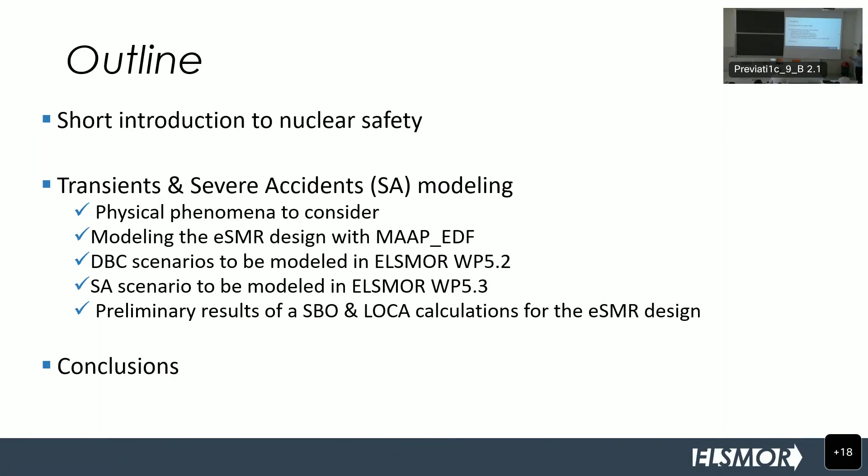And then I'll give you some elements for conclusion. So before I go to the real accidents, just a short introduction to nuclear safety.

Do you know what a risk is? Is it equivalent to a danger? Is it dangerous to do skydiving? Is it dangerous to fly a plane, or is it risky? Do you have elements? It is risky, you say?

In terms of a mathematical or nuclear approach to risk, it's about how dangerous something can be, and also considering how frequently it happens. So it might be a lot dangerous, but if it doesn't happen very often, then the risk is low.

Exactly. So if you take a plane, for example, if you fly, it's dangerous because you can have a crash, right? So it's dangerous. But is it risky? It's not risky, because a crash doesn't happen so often—we only hear about some plane crashes or skydiving issues occasionally.

So what is a risk? A risk is an exposition to a danger or damaging event during a situation or activity. It's defined by the probability of this dangerous or damaging situation. There's a small equation: risk equals probability times consequences—exactly what you mean, depending on the frequency of the situation.

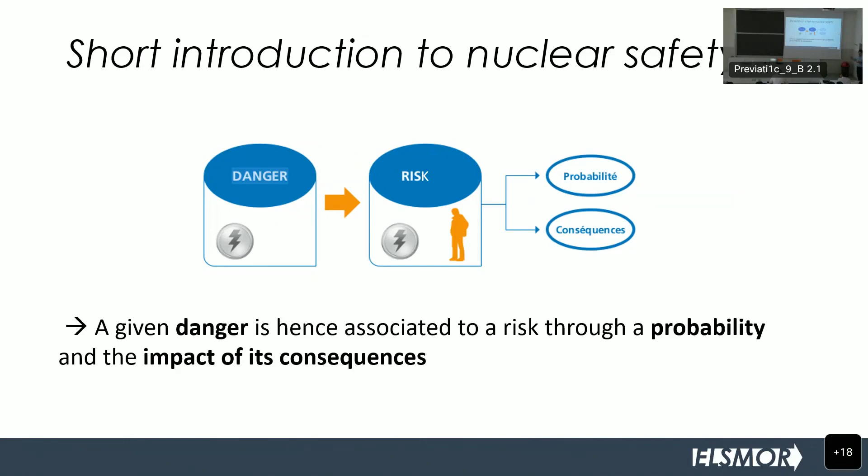Let's look at the Farmer diagram—maybe you've seen it before. It's very well known. Here you have the frequency or probability of an accident or event, and here you have the severity or consequences. This is a line: below it is acceptable, above it is not acceptable. You see what I mean?

So let's say I have a very frequent situation happening every day—I have to have very, very low consequences. It has to be very modest, very low in terms of consequences. But there is still some.

If you go this way, it's prevention—we try to reduce the occurrence of this accident—and this is mitigation, where we want to reduce the consequences. So it's easy to understand. And also, there is something we call the residual risk. Do you know what it can be?

There is this residual risk. It means that whatever we do, we cannot get rid of it. It will, you can do everything, it can still happen. Can you give me an example? I don't know.

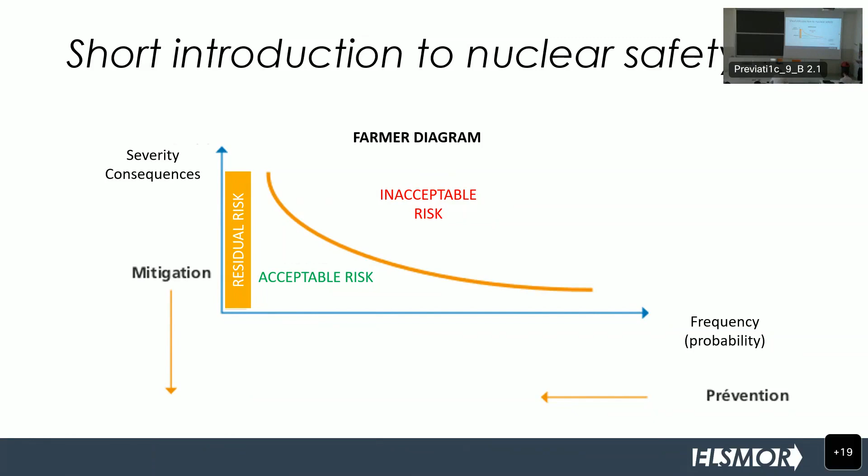So now let's talk about the transients we look at. Here is the frequency by year for this kind of reactor. Here you have the normal operating condition. Let's say we have a hot shutdown, which means the reactor is stopped. It's in a safe position and nothing is happening. It's just in a hot position, and it happens many times a year.

Normal operating condition is what we call category 1. It happens all the time. Then you have the incidence, so the frequency is between 1 and 10 to the minus 2. For example, you have transients like a station blackout or a loss of feed water.

Those transients, like station blackout, are like the Fukushima initiator. Loss of feed water is like your steam generators are not fed, there's no water anymore inside for cooling the steam generators.

If you go to accident now, it's more severe. You have more consequences but the probability is lower. So this is category 3. It can be a small break LOCA. LOCA is a loss of coolant accident, which means you have a break in a pipe, or in an SMR you can have a break.

Then you will have water flowing, and the level of water will decrease if you do nothing. One time, if you don't have any kind of safety system, it may lead to a severe accident. If we have a safety system, we can manage the accident and won't have any core degradation. And the probability of those kinds of transients, like steam line break also, and steam generator tube rupture.

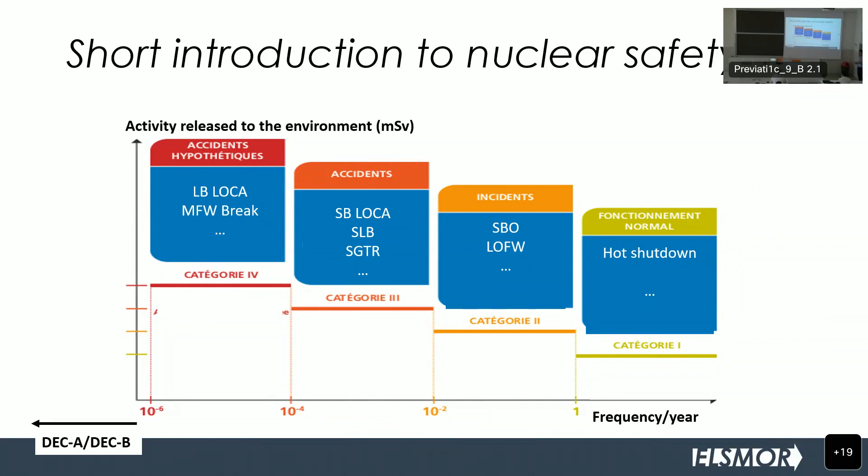So now we know a little bit more about safety and how it works. Let's look at the physics now, the more interesting part.

In order to model an accident potentially leading to a severe accident, in an SMR or a classical PWR reactor, many physical phenomena must be modeled in both the reactor coolant system—the primary side and the secondary side—and also the containment. We have to evaluate the releases and so on. So here is an example, just an example for a PWR.

But for a small modular reactor, it will apply also. So let's say in a PWR, we have to model the natural circulations. Let's say you have lost your pump, the pumps are off. So if the pump trips, it happens a lot. In a year, the frequency is very high. So we have to be able to evaluate the natural circulation inside the reactor coolant system.

We have to be able, for example, to evaluate what is the heat transfer from the core, the basics of the physics. We have to be able to see what is going on with the pressurizers, the heaters, the sprays, the heat exchange in the steam generator, many things. I'm not going to detail everything, but we have to take into account many different systems.

Let's say if you have safety injection, emergency safety functions have to be taken into account too, right? And then if you go to a severe accident, things are much more complicated than that if you are looking at a DBA accident.

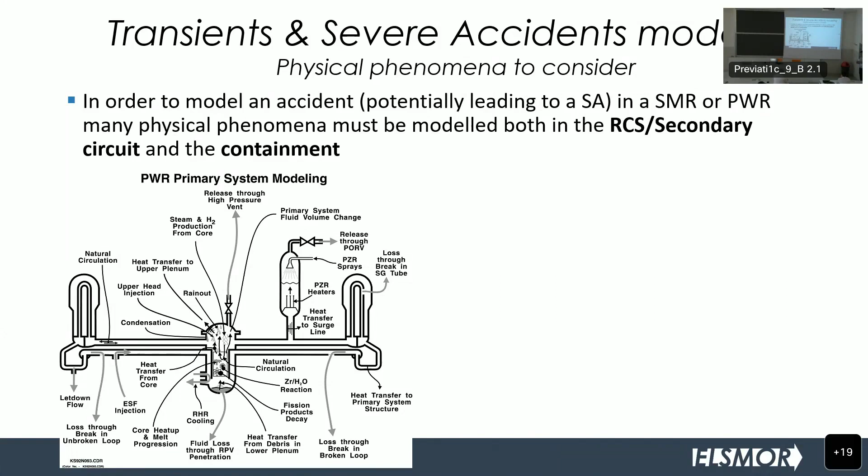So we have to evaluate the flux. So I will show you a video about that. We have to evaluate the flux between the corium and the vessel to see if there can be a breach in the vessel and what condition, what we can expect.

So this is only for the reactor coolant system and secondary side. Let's say this is for the containment. So many other different physical phenomena to model.

So for example, you can have a quench tank flashing, if you have a transient with the heating of the primary circuit, then the pressure will increase, then there will be a flow between the pressurizer and this quench tank in order to keep the water, but when there is too much water, it will flow, there will be a break, and then it will flow directly to the containment.

You have to look at the aerosol deposition if you have fission product releases. You have to look at the condensation. You have to look at the spray if you have spray. Maybe you can have fan coolers, or you have to look at the iodine chemistry. So it's a lot of different physics to look at.

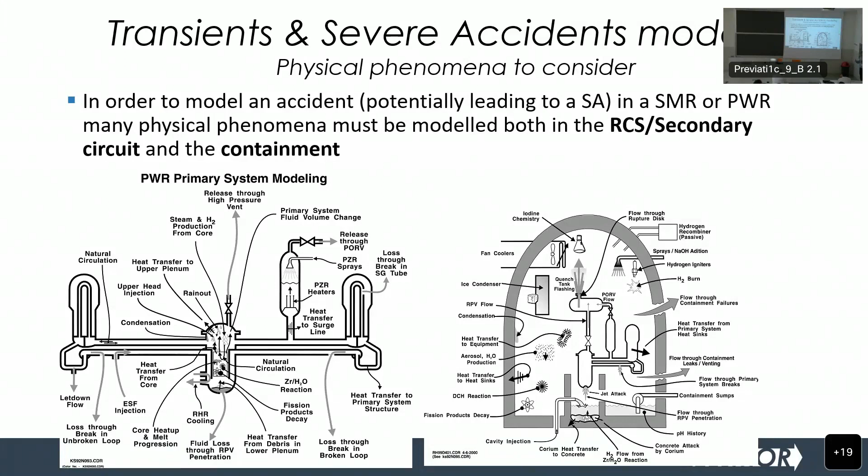So yeah, I just tried to write here what we have as a slide before. So the physical phenomena to consider. So it's not an exhaustive list, of course.

So you have to consider the thermohydraulics in the RCS and secondary circuits, in the containment, the core degradation and melting, if we have, the zirconium oxidation at high temperature, the potential energetic H2 burns.

I didn't talk about that, but hydrogen is a gas, and it can burn and lead to a big combustion, like in Fukushima, for example. That could be devastating for the containment. So we want to get rid of that. We want to be able to stop that before it happens. So we do some things in the reactor like recombiners, or we can use igniters too.

So we have to look at the fission product releases also in the core, from the core and to the containment and the environment. The possibility of a vessel breaching at a high pressure, which is like when the corium is there, and then it's attacking. It can be a creep rupture, and it will have big consequences in the containment and maybe into the environment. So also there is thermochemistry and the thermal exchanges in the lower head.

For what I call the IVMR, I will talk a little bit later. IVMR is a strategy we use in the SMR design. So we want the corium, the magma, to stay inside the vessel. We don't want any breach. So we are trying to cool it down with water outside in order to make sure there is no breach.

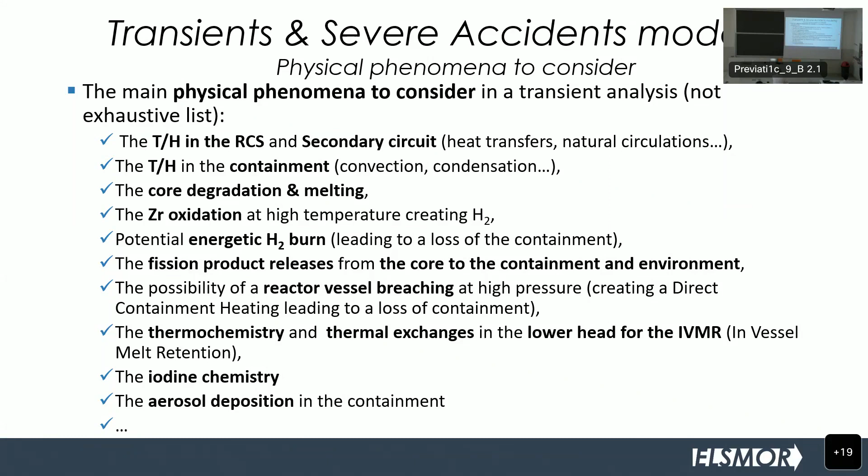So look at the iodine chemistry, aerosol deposition, and so on. Each physical model has to be validated, right? You cannot use it just because you have made a new equation. You have to validate it against experiment or code-to-code comparison, on an already validated code. This code is good, we're going to compare against it.

Also, to ensure this is valid, some models may interact with others. It's very complicated, not only small things. And to make sure all those couplings are well taken into account, we have different levels of validation. We have what we call the separate effect, where we look at separate physics, like thermohydraulics or fission products analysis or just corium heat flux. So we have experiments here like BETHSY for thermohydraulics, and LIVE for the corium behavior.

Also we have what we call integral benchmarking. Integral benchmarking is like we have a small reactor, small scale, and for example we have the Phébus experiment. Phoebus is a CEA experiment, IRSN, it was in the 90s, a French experiment. They used real assemblies and had a severe accident there to look at how the fission products, how the cladding will heat, how it will melt, how the fission products will distribute inside the reactor.

And then after that, we have of course the real reactor cases, like TMI. TMI is a big one for severe accident analysis, and later the Fukushima accident. So we use that to improve our codes and to be able to model those accidents. As I said, a lot of R&D is necessary for this kind of activity, to ensure the code can model a transient, or a transient leading to a severe accident, both.

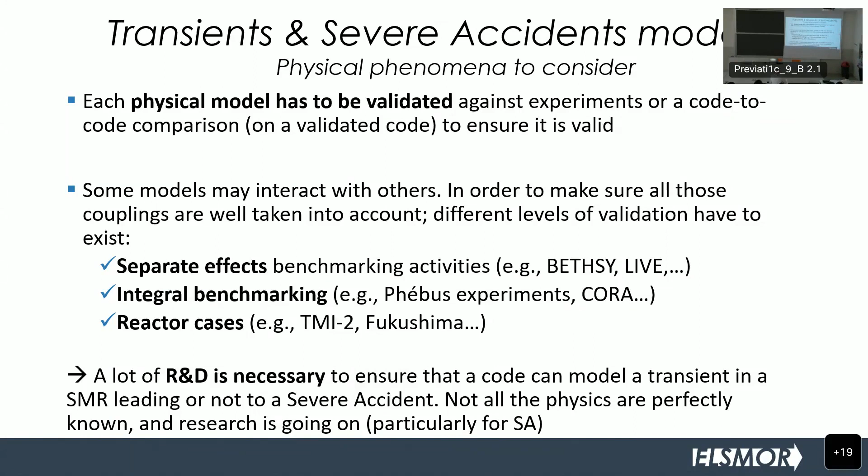Now I will talk about the modeling. How do we model the ESMR with MAAP code? There are many different codes, right? I will show you MAAP, but all the codes have similarities, of course. MAAP stands for Modular Accident Analysis Program. It's an EPRI code, the Electric Power Research Institute, in the US. It enables modeling of both transients and severe accidents for PWRs, and SMRs.

Also it can model BWRs, like the Fukushima reactor, boiling water reactors. It can also model the VVER, the Russian type reactors, and also the CANDU, with our Canadian colleagues having a version to model the CANDU too. So yes, this code is used internationally. We use it in France, it's used in Japan, in England, in all the utilities in the US, in Canada. A lot of people are using it to model severe accidents, and do what we call the PRA, probabilistic risk assessment.

So this, for example, is the meshing we have used for the ESMR design. It's very simple, right? You have only a few nodes. It's not a detailed code like RELAP or CATHARE. You have let's say 10 nodes, but it allows modeling the whole vessel. You have the lower head here, the core, the plenum, the hot leg cone, the hot leg riser, and then the water is pumped from here. It gets hot through the core, then cools down through the steam generator, and gets back to the downcomer and back to the core, right? It's a very easy modelization, but it gives good results.

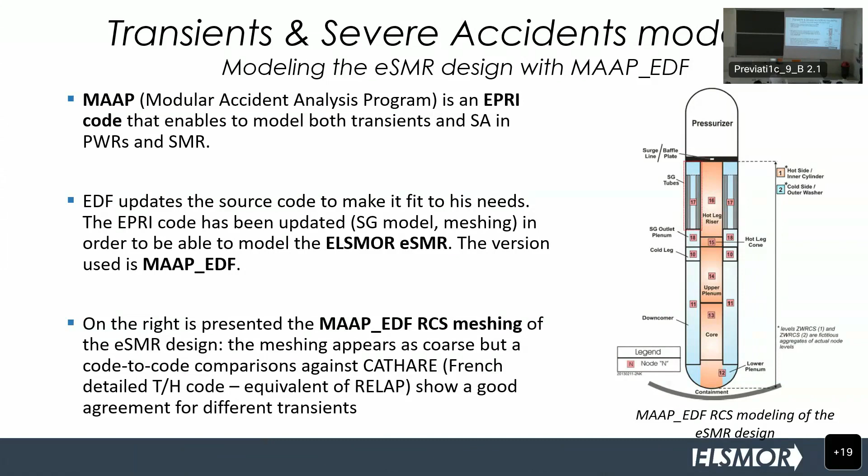So the code enables us to model the transient physics in both, as I said before, the RCS and the containment. This is, let's say, a strength of this code. You can do it all at once.

There is also hydrogen generation. When you have hydrogen generation, the hydrogen is very light compared to air, so it will go up into the containment and you won't be able to condense that. The concentration could get high, and it could lead to a combustion. So we want to get rid of that.

One thing to mention regarding the SMR compared to a large PWR is that the SMR has a relatively small free volume. Do you know the volume of a PWR, let's say an EPR, the big one? What is the free volume in the containment? It's huge - you don't know? It's like 80,000 cubic meters. 80,000 - it's enormous, you see what I mean?

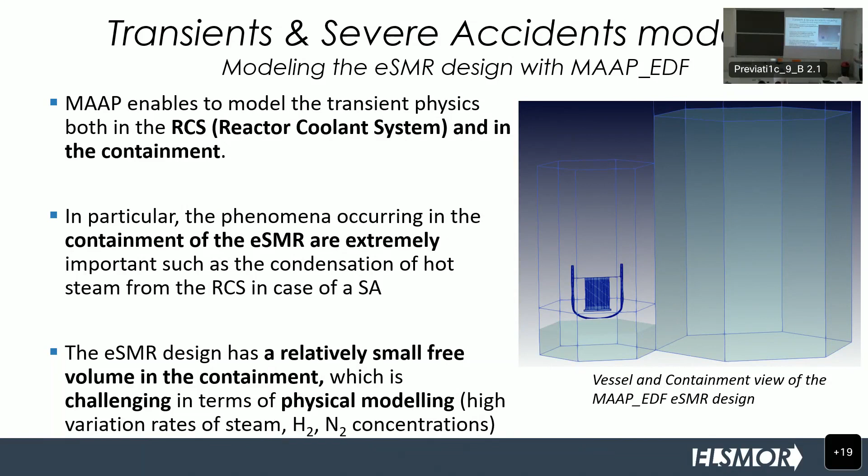So for this kind of reactor, what could be the volume? 5 to 10,000? No - it's like 2,000, you see what I mean? So the power is not so small compared to the EPR power. EPR power is like 4,500 megawatts thermal, and this one is like 540. So the ratio is not good, because you have a smaller volume for a higher power - the power density is higher. So you have to evacuate the decay heat if you have a severe accident. We looked at it too in the ELSMOR project.

Now I will try to introduce what kind of scenario we've chosen to model in WP5.2 regarding the DBA accident - what kind of transient, and what it implies for the safety analysis. We've decided to model two different transients in this DBA transient analysis.

The first one is a station blackout. In a station blackout, I'll talk about it later, but you lose everything - no more electricity supply, so you have to manage by yourself. The pumps will stop, and then you have natural circulation, and you'll see what is going on.

Another transient initiator is a LOCA, a loss of coolant accident. There's a break inside, here for example - you have the vessel, in the primary side, at the top of the steam generator, you see that. You'll have a break. The reactor will depressurize, and if you do nothing, you'll be losing water, and the core may heat up. There might be a heating, and then the core can degrade at this time.

Of course, for the DBA analysis, we assume that we have a safety condenser. Eric already talked about this this morning - what is a safety condenser? Here you have, for example, the NUWARD design - here's the vessel. Inside the vessel you have the steam generator, the compact steam generators, and then you have this condenser with valves you can open or not. There will be natural circulation - it's all passive. The water is heated by the core, goes through the steam generator, and is cooled down.

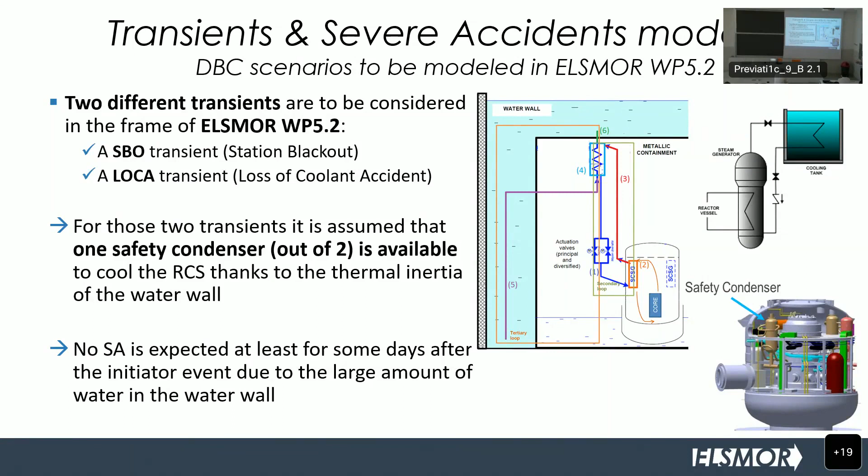Now let's go a little bit deeper inside the station blackout transient. Station blackout, as I said, you have the loss of the main cooling system. This will lead to a scram, reactor scram, so the reactor rods will get inserted. After a few minutes, you will be in decay heat mode, and then you will use the safety condenser, which we call RFP, to cool down the primary circuit, evacuate the decay heat, and depressurize the primary circuit. So physics to address: natural convection, primary side, secondary side, and of course tertiary side. So it's quite challenging physically.

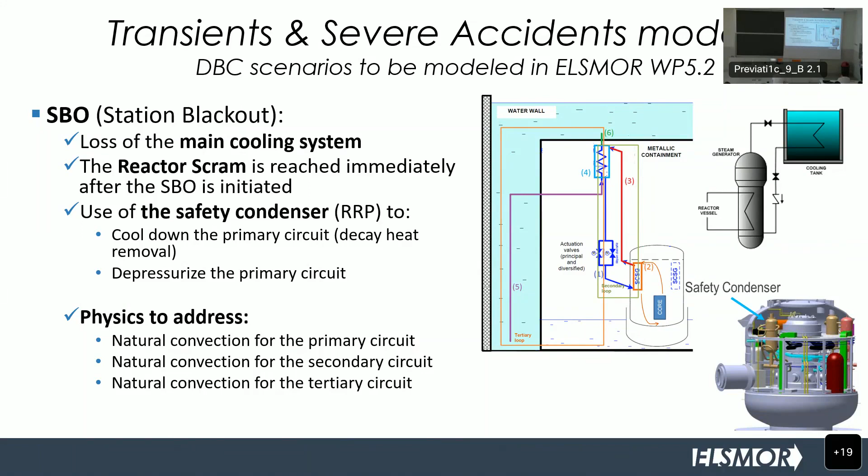Do you understand why? Can you repeat the question? Sorry, to ensure that the controls are fully inserted? Yeah, but do you know why? Maybe I asked the wrong question. The question is, the pressure is going to increase in the containment. Do you know why? Because we have a break.

Because, not cooling anymore - creation of steam, yeah. In fact, when you open a break, let's say the pressure in the vessel is like 150 bars, high pressure, and it's hot water at 300 degrees C. So when you open the break, this water will flash - it will instantly become steam in the containment. So we add a lot of energy in the containment, and this will increase the pressure, right? You know this PV equals nRT equation, of course. And then so many protections exist for the ESMR.

One protection is like a stop on overpressure. If there is an increase in pressure, it's not normal - something is happening, so we have to stop the reactor because of this high pressure. For example, when the pressure reaches like 1.5 bar, then you will have the automatic drop of the rods inside the vessel.

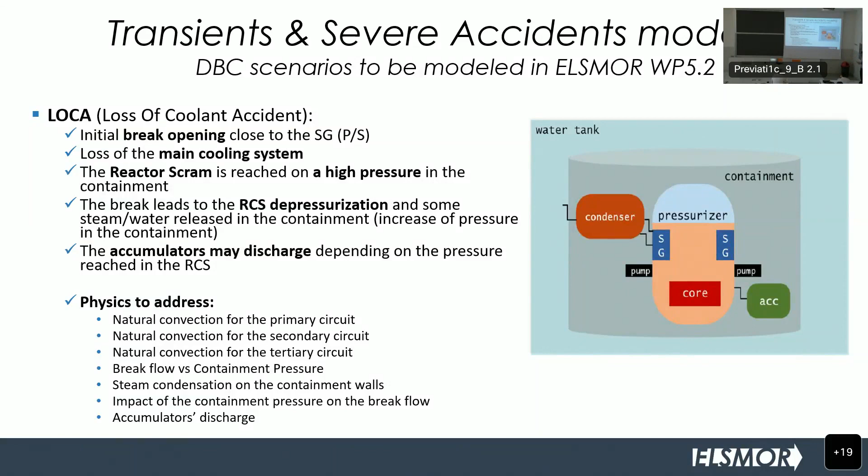So now let's talk about ELSMOR 5.3, which is the severe accident analysis itself. We are going to model two transients, station blackout - same initiator, but the consequences are not the same. Station blackout and LOCA: we assume there is no safety condenser available and no cooling of the RCS, so we expect core degradation.

As the water of the RCS evaporates, one important thing is the onset timing of the core degradation - the time the core begins to uncover. At this point it will heat very, very fast. In about 15 minutes, if the core begins to uncover, you can have a severe accident, and you cannot get back - it's an irreversible process.

Containment pressure and temperature will increase due to the creation of non-condensable gases and hot gases, as I mentioned before. It's a whole thing.

So here, for example, you have a picture of core degradation calculated by MAAP, but I will show you a video now. Just before that, I'll give you the sequence of the transient so you understand better. So the station blackout - let's say phase one is the initial phase of the accident.

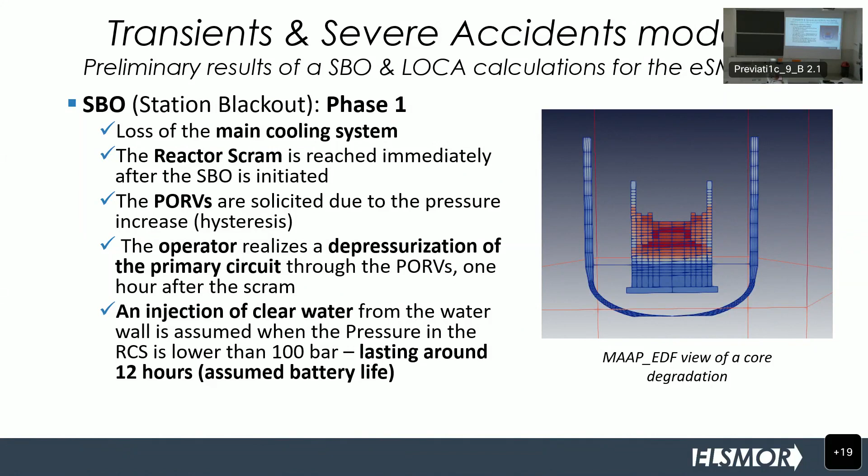But this system is not passive - it's an active system, so it has to rely on the battery, and the battery life is around 10 to 12 hours. So after 12 hours, no more water. There is no miracle, right? If there is no water, you go to core degradation.

Yeah, I have a video. I don't know if I have to go... maybe.

Just below. It's below. Click here. Below. Below. I think it's below. It should work. Voilà. Okay.

Okay, so this is, for example, a MAAP calculation for the station blackout transient. So you see the water wall here, the containment here, very small, and you have the vessel here, right? So you can see only the vessel, but it's good to see the severe accident progression.

So you see that at the beginning we had a level of water. The level of water is increasing because we are sucking water from this pool, right? After a while it stops, because of the battery life, and then we are going to degrade. I didn't want to show everything at the same time, but it's okay, no worries.

We are going to talk a little bit about what's going on. Once all the water is evaporated, you see what I mean, the core is going to melt, producing a lot of hydrogen. Here you have this variable for the hydrogen concentration in the containment. You see that it goes to 60%. You know 60% is huge.

Do you know Shapiro diagram? No? Shapiro diagram is just that, if it is possible you have a combustion or not. If you have a concentration of hydrogen higher than 4%, you can have a combustion. Here it's like 60%, so if you do nothing, you will have a combustion.

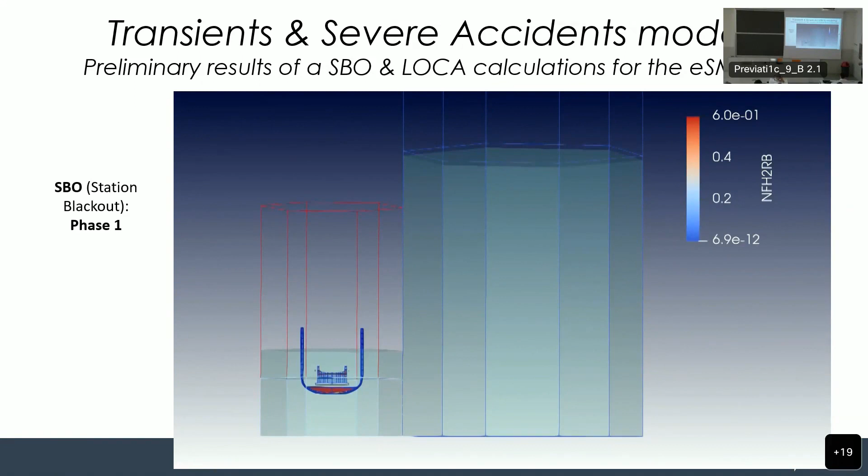So yeah, I talked about everything at the same time. It's okay. So after the water injection stops, no cooling, the water is evaporated, the core uncovers, starts to heat up, hydrogen is generated, the core melts, and the water outside the vessel enables us to cool down the whole thing. So we are lucky in that case.

The IVR situation is good, especially because we have, let's say, a small core. It's a 540 megawatt reactor, so the decay heat after a while is 2-3 megawatt, you see what I mean? So you don't have any kind of issues because it's a large vessel compared to the decay heat we have to evacuate. I will show you heat fluxes in a minute.

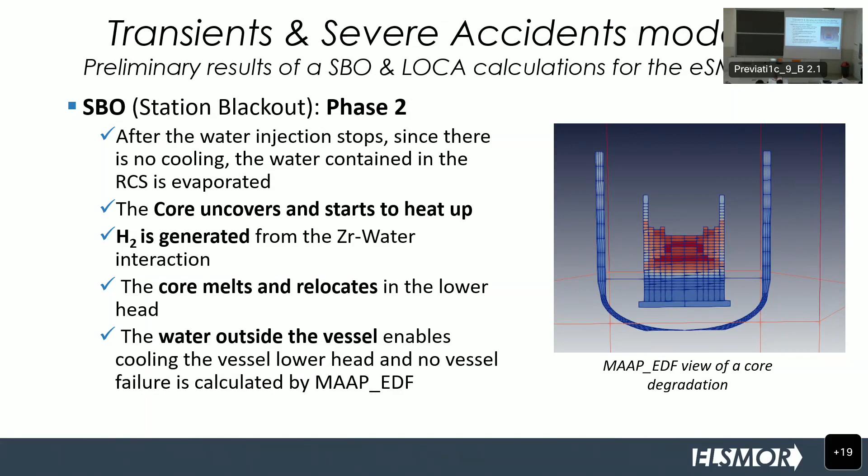So this is a zoom, you know what you saw before. You have a zoom of the core here, the support plate here, and you have the vessel lower head here. You have the circular part or ellipsoidal part of the vessel, and then you have the cylindrical part, the straight part of the vessel, and then the bottom.

And yes, it is a video too. I'll try to make it work. I don't know. Yeah, it's working.

So at the beginning, you see that the level is increasing, the beginning of the transient. After a while, you will see the core degradation here, and you will see that it goes very fast. Whenever you start the core degradation, you cannot stop it easily. Even if you re-inject water, it's not always good, because you can produce a lot of hydrogen because of the steam reaction. Yeah, quenching the core is difficult.

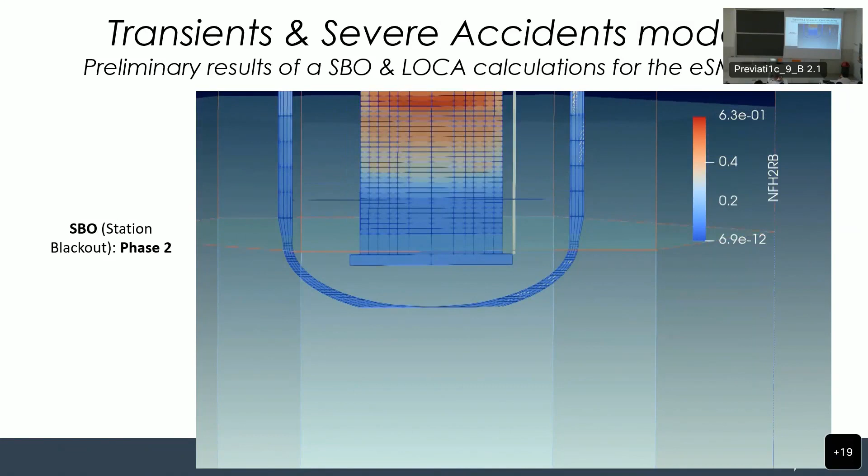You see the core degradation here, it's hitting here. So here the scale is for hydrogen, but here, of course, when it's red, it's high temperature. It can go up to 2,500 Kelvin, the temperature inside here.

And then the vessel, you see that? Maybe it's not very clear, but we calculate the heat fluxes inside the vessel and outside the vessel. If the heat fluxes of the corium is higher than the heat fluxes extracted from the water, you will have like a creep, ablation of the vessel, which could lead to a vessel creep rupture, right?

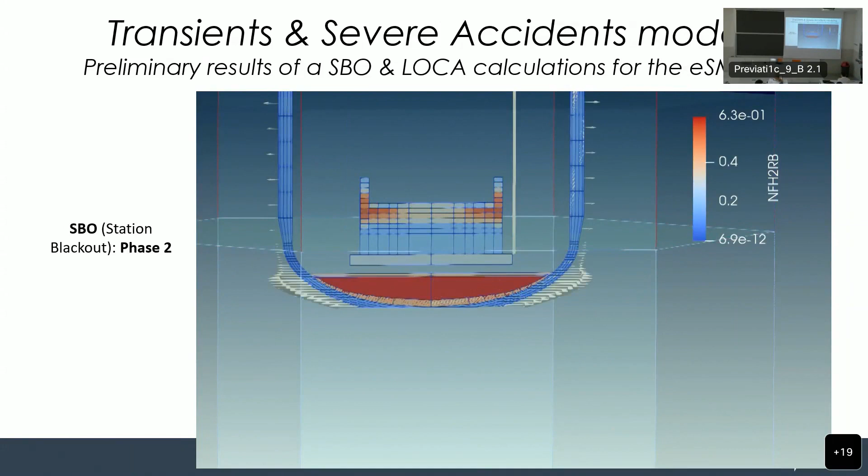So we want to prevent that, we want to eradicate those things. We have to ensure that the water is in-house, the circulation of water is good in-house to prevent those breaches. Yeah, so it's just what I wanted to show you for the station blackout.

I have the same kind of approach for the LOCA transient. So for the LOCA transient, you will have the loss of main cooling system, reactor scram, and then the operator will realize the depressurization of the primary circuit, and then the accumulator will start because the pressure is decreasing. So the accumulator mechanically will go inside the vessel and save time.

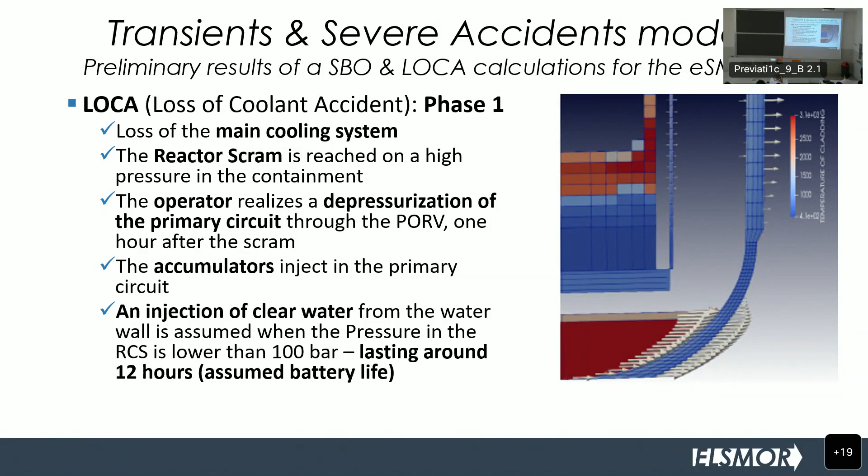And in the same kind of way as for the station blackout transient, we assume there is injection of clear water, with a limited battery life. This will then go to a severe accident. So maybe the same kind of behavior is to anticipate - we have to anticipate the same kind of thing. So the initiator is not the same, but for the long time evaluation, you can have the same kind of consequences.

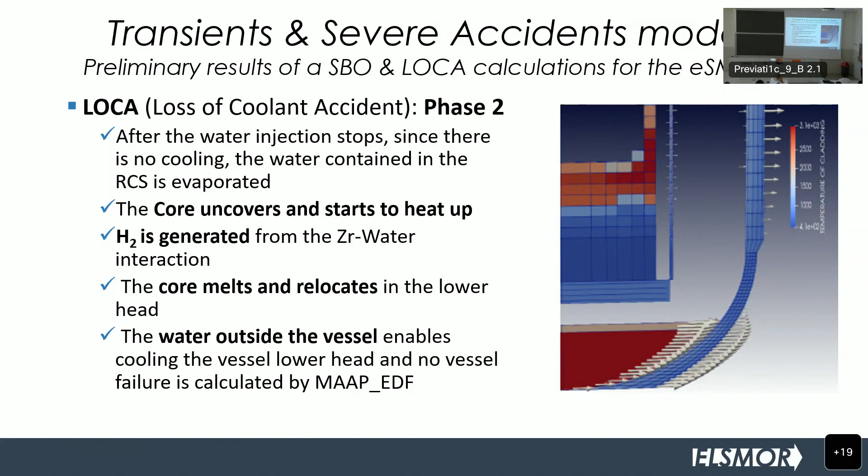So I had the video, but it's very close to the other one. Maybe if we don't have time, I will skip that. I'll go directly to the conclusion.

So the modeling of accidents and transients with validated code is a key element to certify the safety of a reactor design, just as was mentioned by our Canadian colleague. Severe accidents are evaluated natively now for SMRs, which was not the case for a reactor in France, like the older reactors, 900 megawatts, 3 loops. They were built in the 80s, so they didn't embed those kind of severe accident analysis at that time.

So now we are considering, as our Canadian colleagues say, every 10 years we have a periodic review, and now severe accidents are modeled, and we have to mitigate the consequences in the French fleet. So it's not because the reactor is old that it's not good. It's like an old car - if you have an old car, but every 10 years you modify the engine, you change everything inside, it's like a new car, right? So it's exactly the same for the reactor we have.

So the modeling of the eSMR design is challenging because it's less validated than the large-scale PWR. We have less experiments, right? Less code-to-code comparison. So we are going through projects like ELSMOR - there is a new SMR project, the severe accident project is going on. So yeah, it's challenging for us.

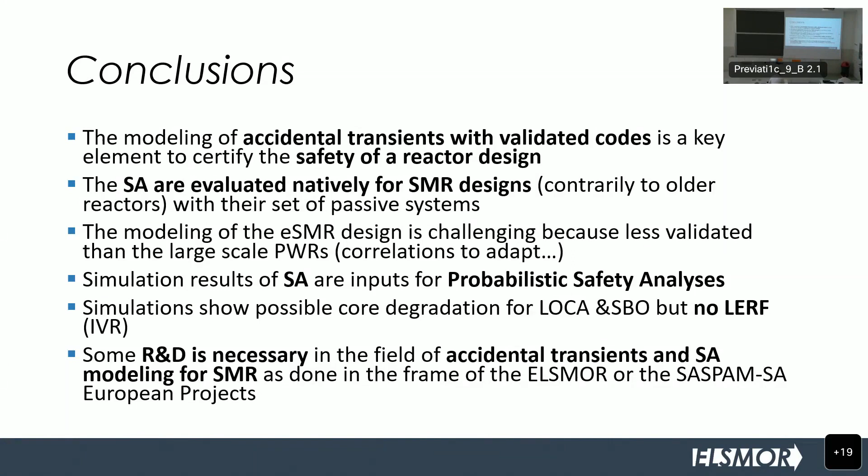So we have time. And a word to say that some R&D is necessary in the field of accidental transient and severe accident modeling. So you have understood that, and it's done in different projects. And of course, young people like you are welcome to work with us in that field because it's very challenging - a lot of physics, different physics, different modeling. There's the code aspect, numerical aspect, physical aspect. It's got a lot of things going on. So thank you, and if you have questions, let me know.